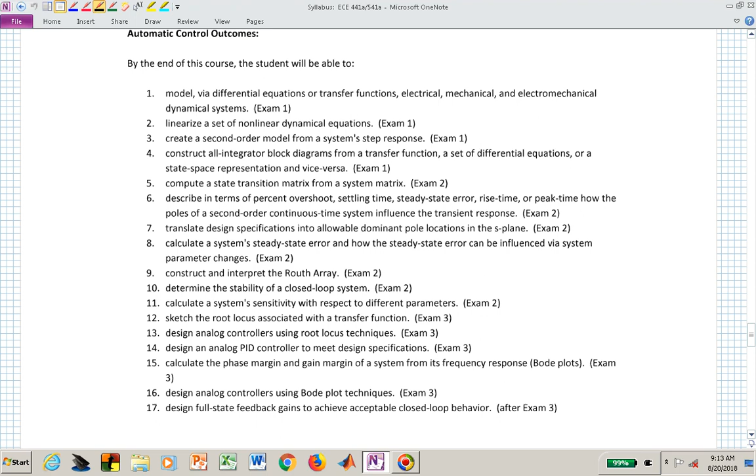This is the final exam right here, so we'll skip over that. But again, this is all on the D2L website, but that's the list of topics that if you can do those, maybe forwards and backwards, you should be okay for the final. With this outline, the way that you can use this is to read ahead. I'm expecting you to sort of read in advance.

If I now give you an assignment in class and you're working on it in class, maybe it won't make any sense at all if you haven't pre-read the material or maybe even watched a video. I might give you some pre-class videos that you can watch. They're helpful if you need to fall asleep. But that might prepare you, I hope, for the class the following day or the days to come.

But the way that you can use this outline is to look at the topics and correlate that with the references that you're using. If you're not using the textbook, you can now start to see, oh, does this book have something to do with modeling, mechanical system modeling, electrical circuit modeling, or electromechanical, Bode diagrams, or state space representation? How do we do that?

Well, all of this is now explained or lined up relative to our homework assignments and our exams, and you can hopefully clue yourself in as to the topics that we're covering when and how we're covering the material in the course.

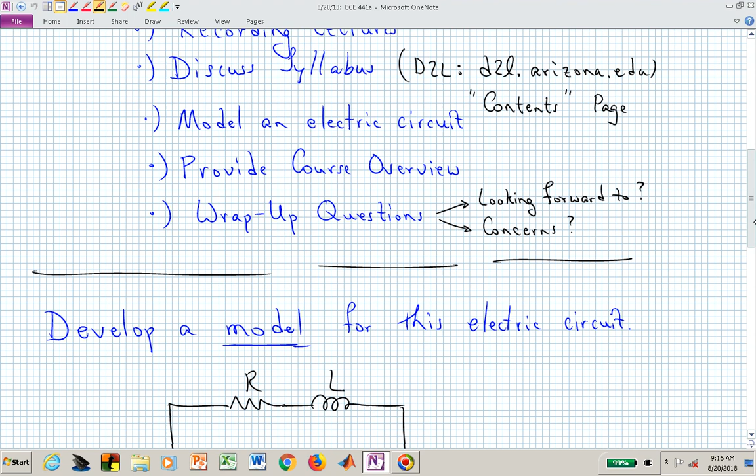We've now gone over the syllabus. The first thing that I'm going to do is actually have you do an activity, which is to model an electric circuit. Then we'll do the course overview and we'll have some wrap-up questions. Here's your chance to show me how much you remember from the summer break, and that is to develop a model for this electric circuit. Go. You have a few minutes, and you can work amongst yourselves if that feels better for you. You can work individually, you can work with your team, but now I'm going to give you 3 or 4 minutes to come up with a model of this electric circuit.

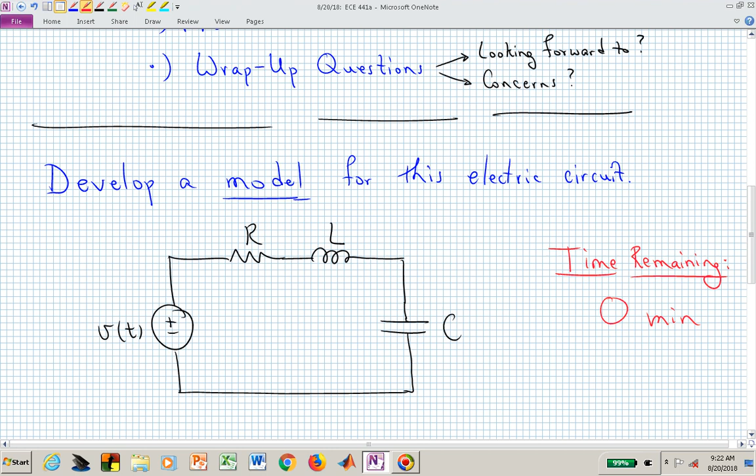That's okay. We'll get to state space representations, and they're both useful for different reasons. And that's, I hope, something that you can now think about when you're starting to read and work through, and maybe in the next lecture or two, we'll start analyzing electrical circuits, and you'll say, okay, now I know, now I can figure this out, now I can find a transfer function, now I can find a state space representation.

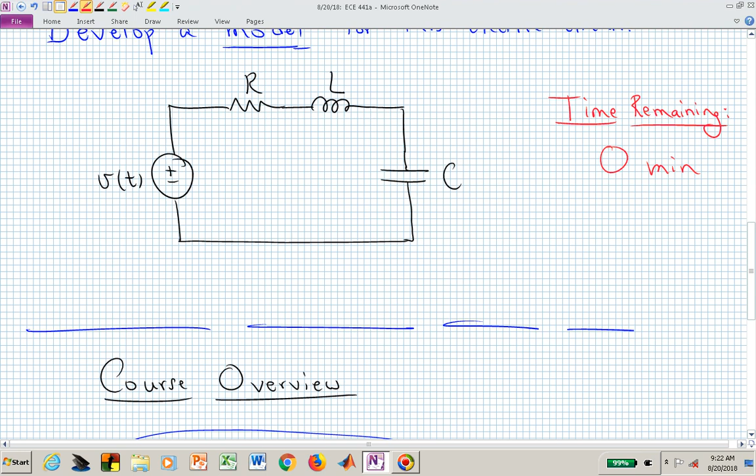That's my model. That is a model, not the model. But did I say a? I think I did. Develop a model. There's many different ways of modeling that circuit. And that's actually the first part of the class. The class is really separated into three different pieces or parts. The first part is modeling, so that's where we're going to begin this class.

We'll then transition into how do we analyze these systems? Are they giving us the behavior, the performance that we want? And if not, that's the reason we go into the third part, which is how do we design controllers to manipulate the system dynamics to make it behave more effectively or in the way that we want it to behave.

In this class, then, we are going to spend some time with modeling in the continuous time setting, and we are going to really be saying, let's look at modeling these via physics. For example, in a mechanical system, what's the equation that you'll just recite? And I cued you in with the F. F equals ma, right? So with a mechanical system, you might be using F equals ma to develop the equations, and I'll say this many different ways, but the governing dynamics, the way this system behaves, its model, there's many different ways of referring to this, but that's now how we might treat a mechanical system.

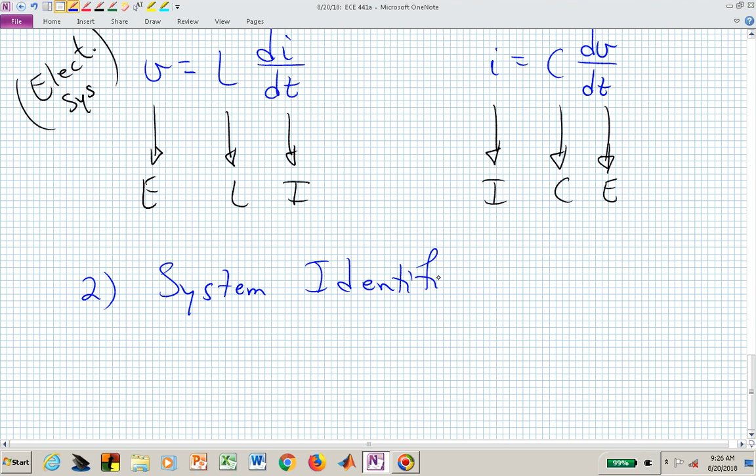The second way that we will learn how to model systems is via system identification. With system identification, you're going to go into the lab and you're going to kick the system, not literally, but you're going to push it with some input commands. And the system might now do something like that. This is now a time domain, and this might be the output. That might be the position of the mass in our mechanical system in the lab.

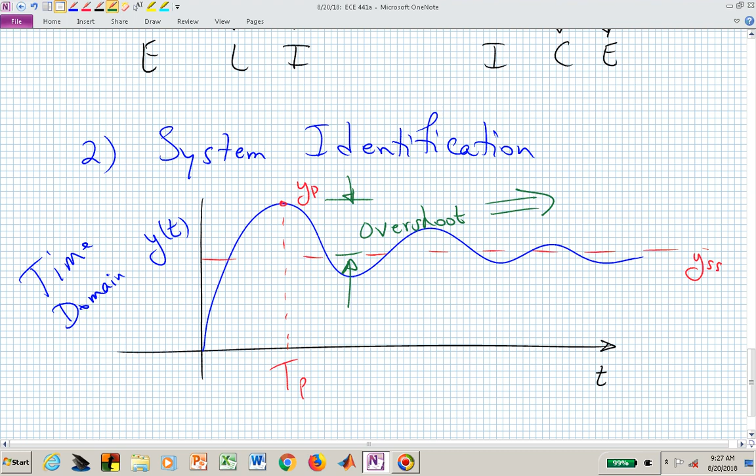And based on that, we can now identify eventually where we might end up. Let's say there's our steady state value. We might have a peak value that we can measure. We might measure the time that that peaks, the time to peak. This distance here we will call the overshoot, and we can then compare that with where we end up, y steady state, to actually find the percent overshoot.

We also might want to know, theoretically, we never really settle in a linear system. It just keeps bouncing back and forth, but eventually we will get inside a tube. And that tube could be a 2% tube, and that's what I'm trying to indicate with the dashed lines here. If I say, what's the 2% settling time? That's now the time, the first time that that response enters into that 2% tube and stays inside that tube.

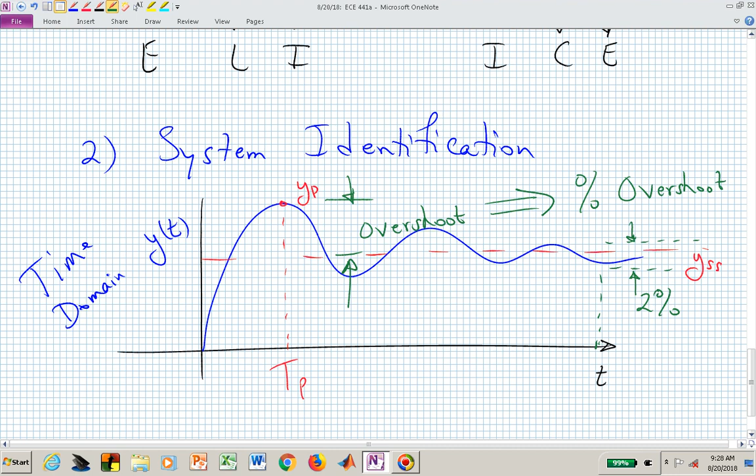You can see that if I move that 2% tube further to the left, I'm going in and out of that tube a few times, but eventually I will go inside that tube and never exit. That will be my settling time, and we could have that referred to as T sub s. So here was our peak time, and here is our settling time. And depending on who's asking, we may have a 2% settling time, a 1% settling time. We can talk about those and what that means relative to the time interval, capital T sub s.

But all of those are now going to be used to allow us to indirectly find a transfer function for our system. And that's our first lab. We know how this mass spring damper system might physically be modeled, but now we want to measure some data and actually extract or infer the transfer function from that data without going in and physically trying to determine the spring constant, the damping, the mass. Maybe I'll tell you what the masses are, and that will help you determine some of that transfer function.

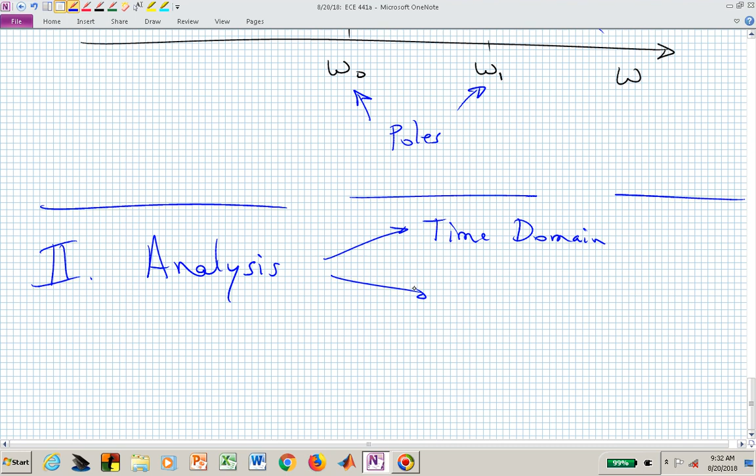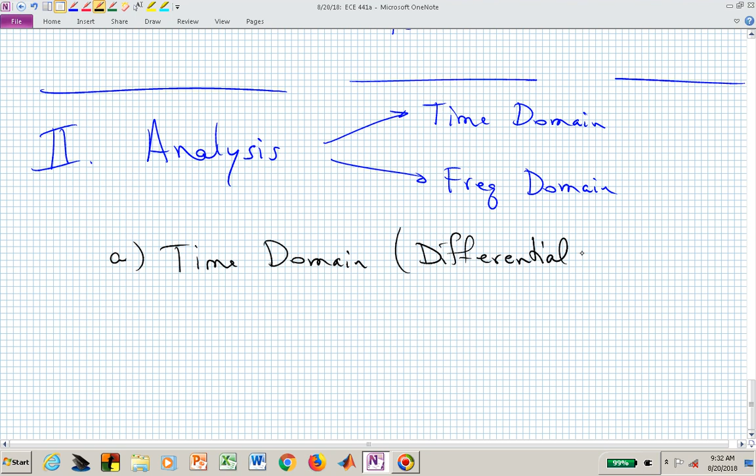That's the first part of the class. How do we start measuring or modeling system dynamics? Once we have a model, now we can go into the second piece of the class, which is analysis. And like we did for some of the modeling, we can do this in the time domain, and we can also do it in the frequency domain. If we do it in the time domain, now we might be looking at differential equations and similar behavior that we've already looked at in the modeling.

We might have some time response, and from that time response we're going to figure out what is my peak time, settling time, etc. What's my percent overshoot? So we have all of these that maybe we're not happy with, and we might now want to know, oh, my boss actually wants the percent overshoot to be 10% and not 80%. Oh, well, I'm glad I analyzed the problem. Now I can figure out what I need to do to hopefully allow me to meet the design specifications that are being requested.

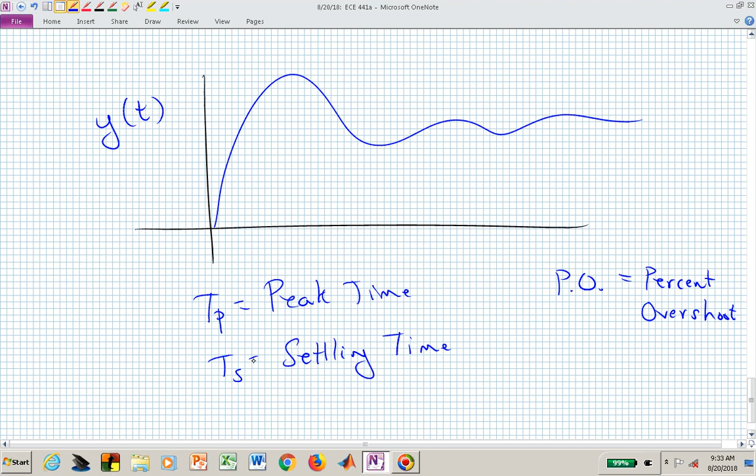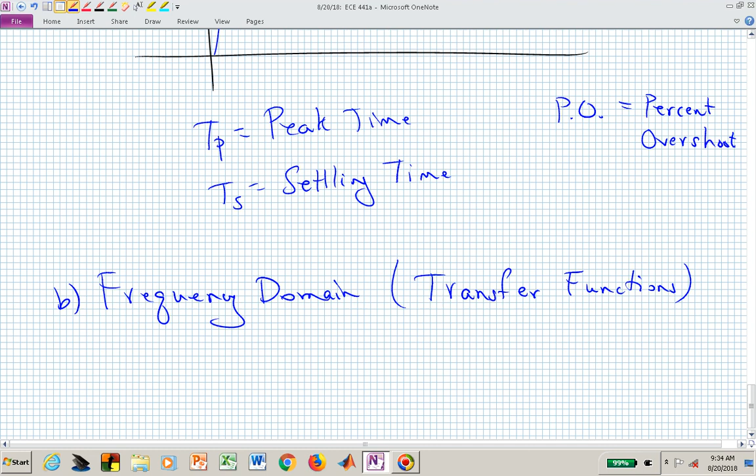In the frequency domain of analysis, instead of differential equations, now we may be having transfer functions. Now we have this S variable that everybody kind of likes. They get very warm and fuzzy when you start throwing S's around. What do the S's do when you work in the frequency domain? The math is easier, isn't it? Now we're doing sort of algebra instead of solving differential equations. We've already looked at Bode plots.

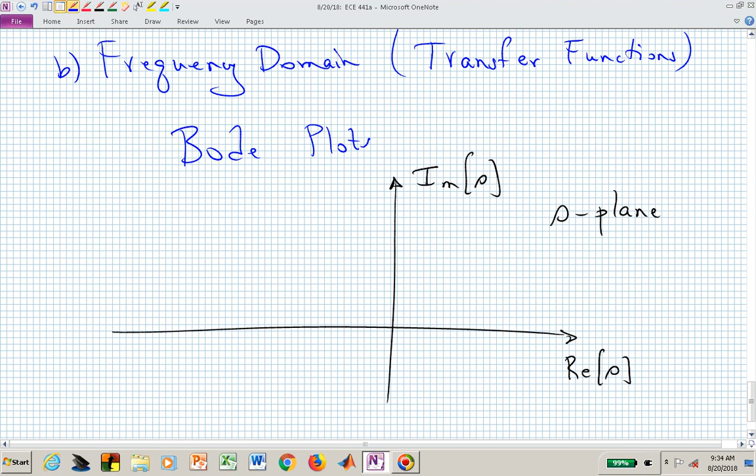Another plot that we will look at in this class is a pole zero diagram, or the S-plane, where this is now a complex plane. Here's imaginary values, here's real values, and we might now place on this complex plane where our poles are located. We might have a pole there, we might have a pole there, and if we have real coefficients in our system, those complex poles have to occur in complex conjugate pairs.

But now somebody might say, well, I want to control this system, and they put it into a closed loop configuration and they start adjusting the gain. Now those poles actually are changing from open loop poles, which are the X's, to closed loop poles, and you'll learn how to sketch a root locus based on this kind of system description of poles and zeros and adjusting parameters in that system model.

And typically in this class, the automatic control class, the place we usually try to avoid is the right half plane. The right half plane has positive values of exponents, and that goes unbounded if you cranked up the gain and said, oh, your closed loop poles are now at those locations. Even though we have one that's stable, we have two that are unstable, and that causes our whole system to behave in an unacceptable manner. It goes unbounded in a very short amount of time. So we'll learn how to sketch those root locus diagrams in this class.

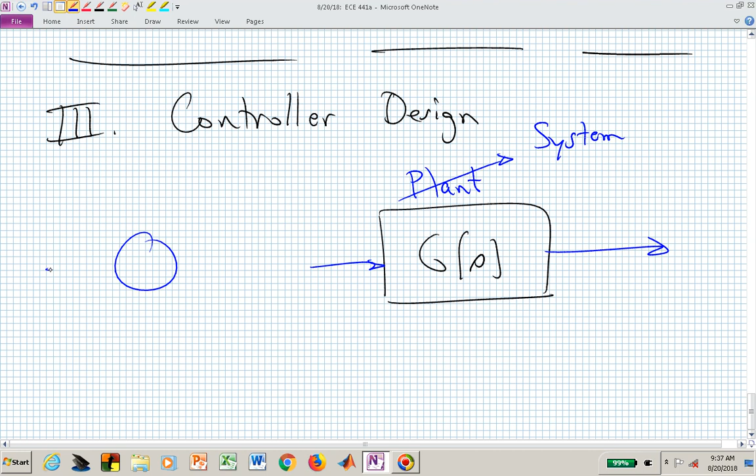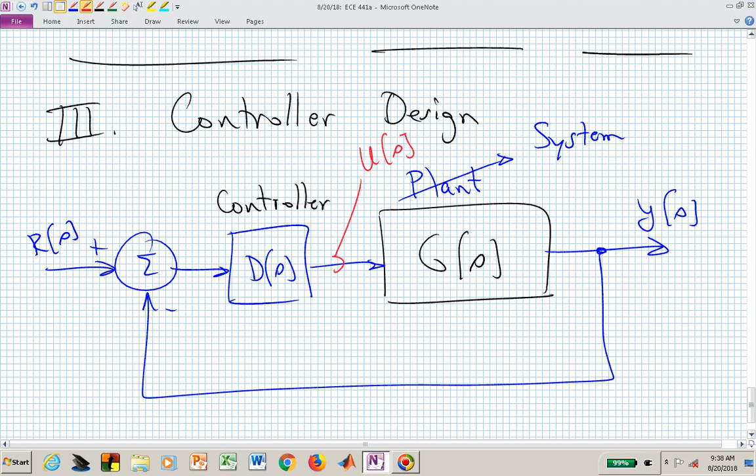And you're wanting to change the dynamic behavior of that system, and you're going to do it by introducing a measurement of the output, Y of S, feeding that back and comparing that with some reference input command, R of S, and feeding that information through another transfer function, which we're calling D of S, to produce an input to the plant, U of S, in this closed loop configuration. What we are going to try to better understand in this class is how do we create these D of S's.

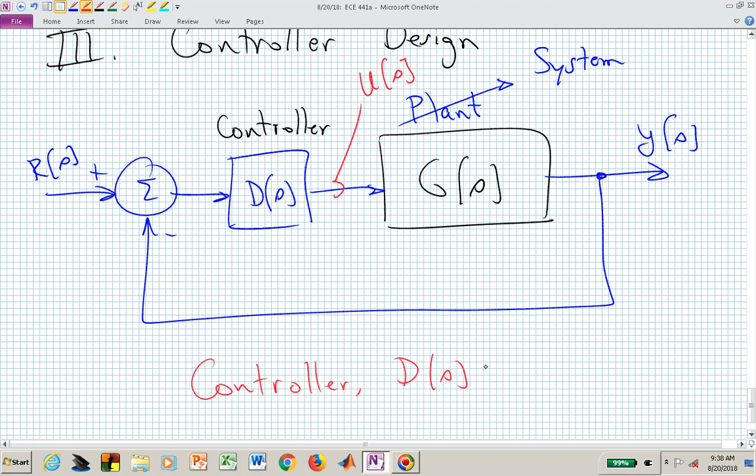How is that done? We have tools now built up from the first two parts of the class. We can look at designing controllers based on a root locus diagram or reshaping that, maybe reforming a Bode plot to make it bend and kink in different places. How do we make those adjustments in the frequency domain by pole and zero selection in our controller? Or how do we do this using state space approaches?

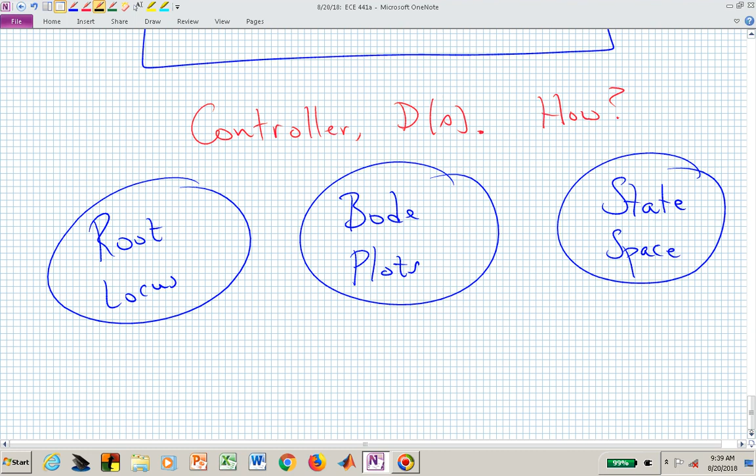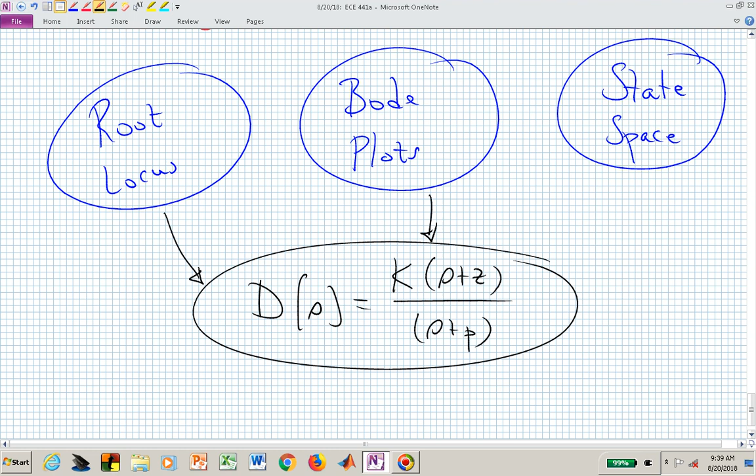We're going to grow into this gradually. The first controllers that we will probably deal with will be D of S's that are actually first order. By first order, that means we have a first order denominator expression in D of S that has S to the first power. That's first order. We can build these, or figure out how to pick Z, P, and K, using our analysis tools of root locus and Bode plots. How do we start adjusting or figuring out how to select Z, P, and K?

In state space design, now we're doing, and this is actually what we will do in the second lab, full state feedback. In the lab, we will assume that we can measure the position and velocity of this mechanical system, and then we'll feed those signals back after adjusting them with gains, putting those back in to drive our system to hopefully make that original mass spring damper system behave differently.

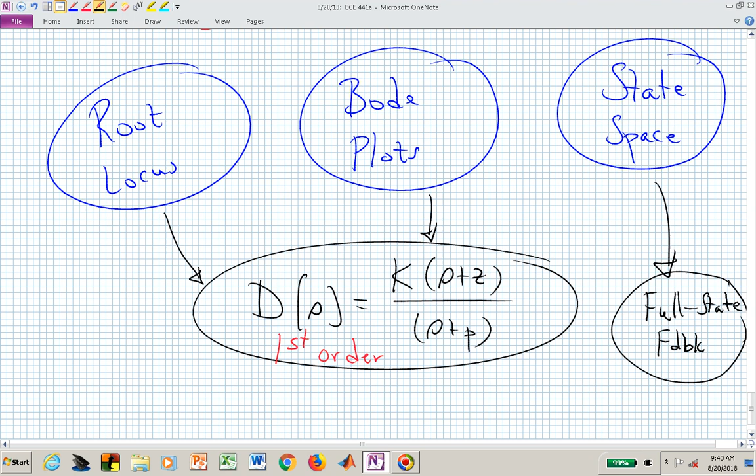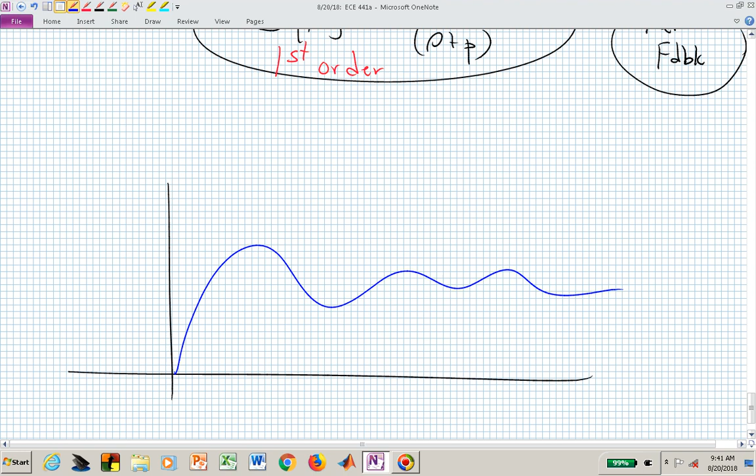And the blue curve is our open loop response. And what I haven't done up here yet is say that...

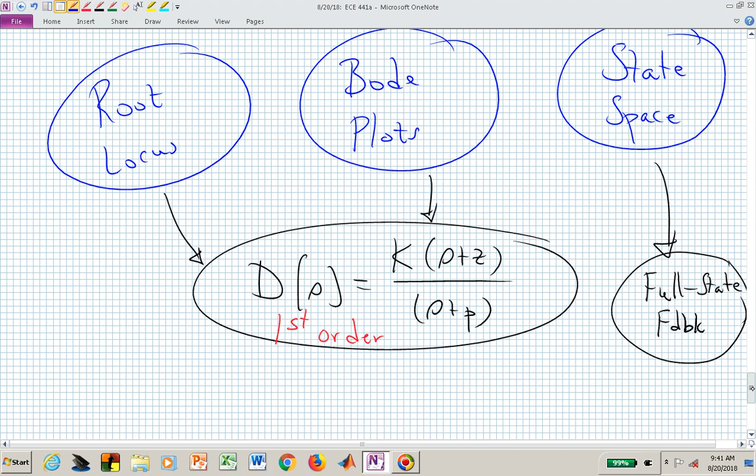...we can actually do more than first order controllers. We can get higher order. We can put more poles and zeros into our controllers. One of those strategies...

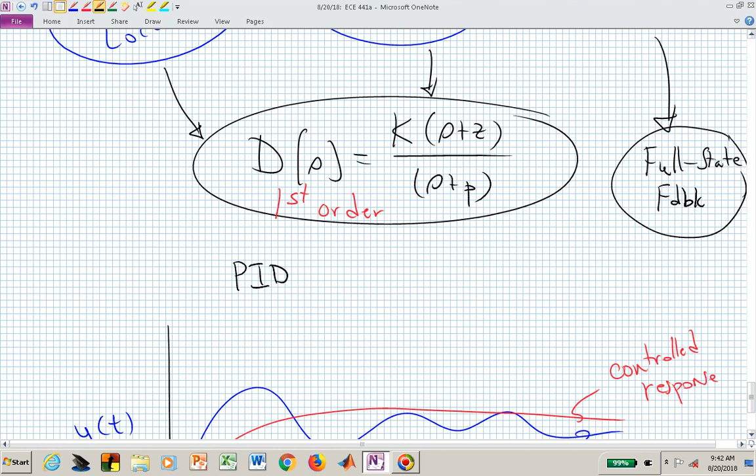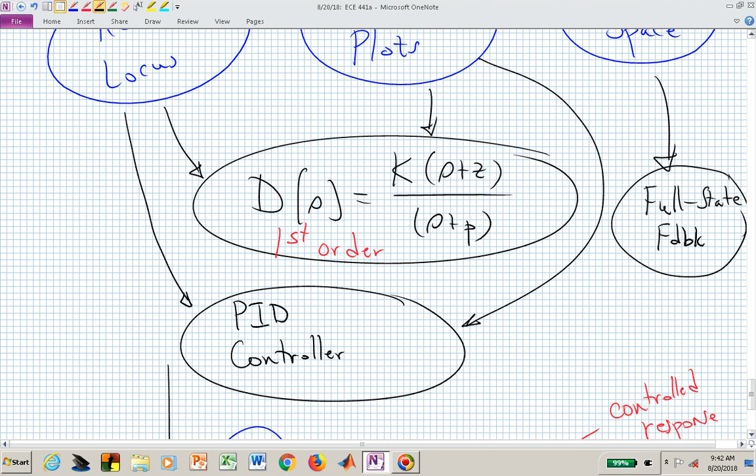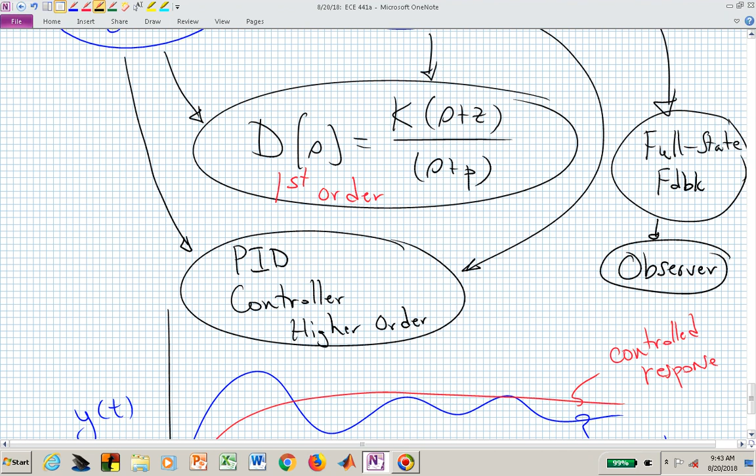And with full state feedback, maybe we can't physically go in and measure all the positions and velocities, temperatures, currents, voltages of our complicated system. Maybe we have to build up an observer that will actually recreate those variables and then use that to control our system. Within the full state feedback strategy, with time, we'll figure out how do we, well it's not really from full state, we're going now from the state space down into an observer and using those observer variables to now figure out what we want to accomplish with our controller design.

That's, in a nutshell, an overview of the class. Those are the three parts of the class. We have modeling, which you now are experts in modeling. You demonstrated that with your model for the electrical circuit, correct?

Yeah, okay, very, very confident looks coming back from the audience. And if you're playing along at home, you can look into the mirror and give a confident look to that response or that answer to the question.

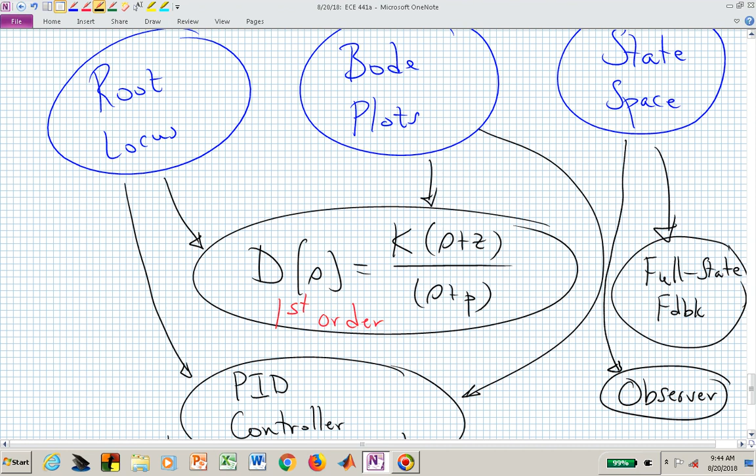We'll figure out how to analyze systems and then how to build controllers.